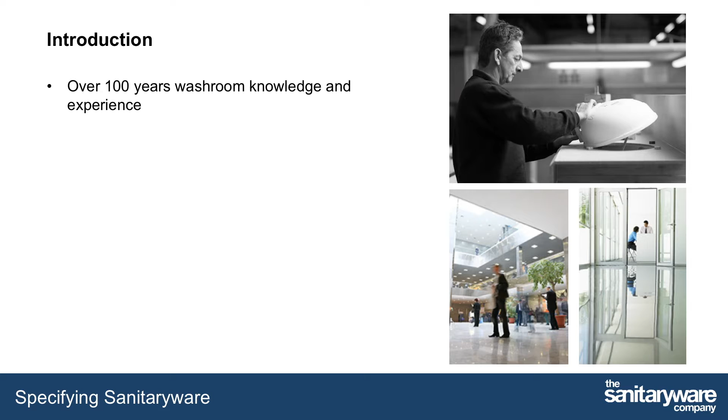The Sanitaryware company has been born out of over 100 years of knowledge and experience in the washroom market. They cover projects over the whole of the UK with offices in both Northamptonshire and Staffordshire, and are able to assist you with specifying sanitaryware for projects by providing technical information and advice, arranging samples, mood boards if required, and creating project-specific NBS specifications.

A good sanitaryware supplier will be able to provide you with the following: design advice, 2D CAD blocks, technical product data sheets, standard NBS documents, bespoke specification writing service, dedicated project manager, customer service team, product guarantee, and easy contact options.

The learning aims of this CPD are usage, design, building regulations and standards, along with budget, and how each of these factors into what sanitaryware items are specified for a project.

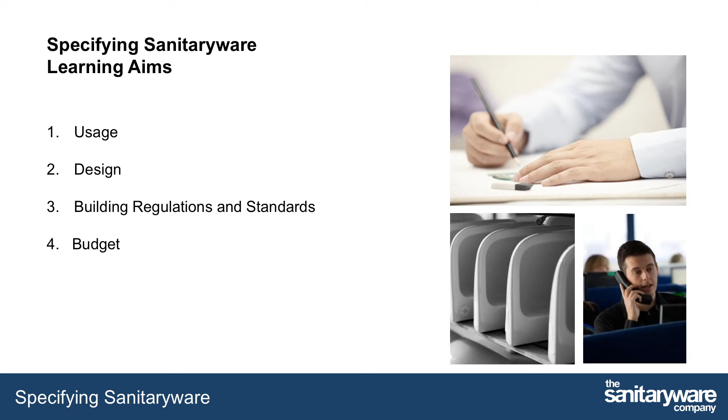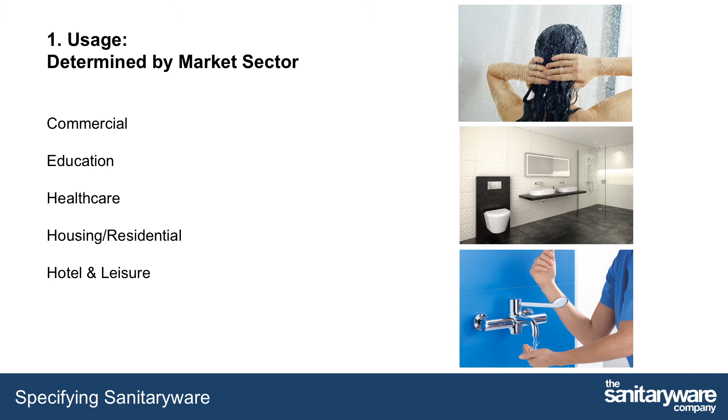When specifying sanitaryware, considering the nature of your environment, the type of building, and the market sector will very much determine the product you choose and what characteristics are most important in that decision.

When specifying projects in the commercial sectors, there are several factors to consider. The look of an item may be a key consideration depending on the areas. For example, a high-end office project may consider this the most important factor in the decision on sanitaryware. In this situation, wall-hung WCs, vessel basins, and brassware available in stylish finishes such as matte black would be considered.

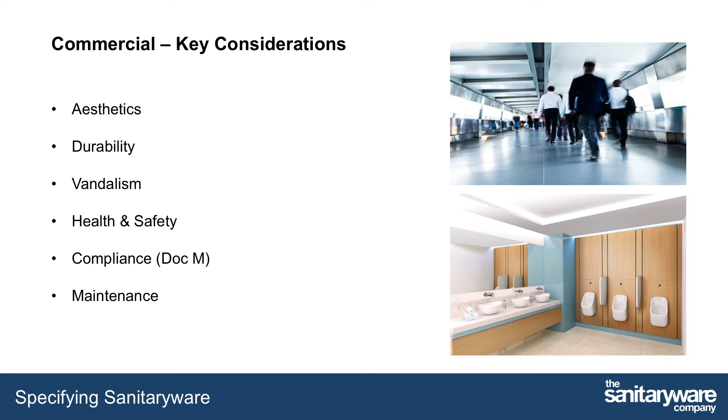Whereas in a warehouse factory washroom, the overall look of the items may fall much lower down the list of considerations. Durability and resistance to vandalism may be considerably higher.

Projects within the education sector will need to consider some other factors compared to commercial projects. In addition to vandalism and durability, which must be considered in the same way as in the commercial sector, health and safety must be a key consideration. TMV3 valves should always be fitted in the education sector to prevent scalding.

There are several regulations to consider in the education sector which specifically relate to the washroom environment. BS 6465 offers a scale of provisions for all non-residential washroom facilities, giving guidelines for nursery, primary, secondary, and further education washrooms. This will be covered in more detail later in the video along with examples.

The first consideration when specifying sanitaryware for the healthcare environment should always be compliance with any regulations. The regulations which would have a bearing on the sanitaryware are HBN 0010 Part C for England and SHTM 64 in Scotland. This covers guidelines for sanitaryware assemblies in healthcare environments. We will go into more detail about these during the regulation and standards section of this video.

The aesthetics of products are most important in residential projects, and this is often linked to the budget for the overall scheme. If it is a private bathroom refurbishment where you are working directly with the client on their own bathroom, they will want to pick items based on how they look and fit in with the overall style of not just the bathroom but their whole house, so the decision may rest on their personal preference.

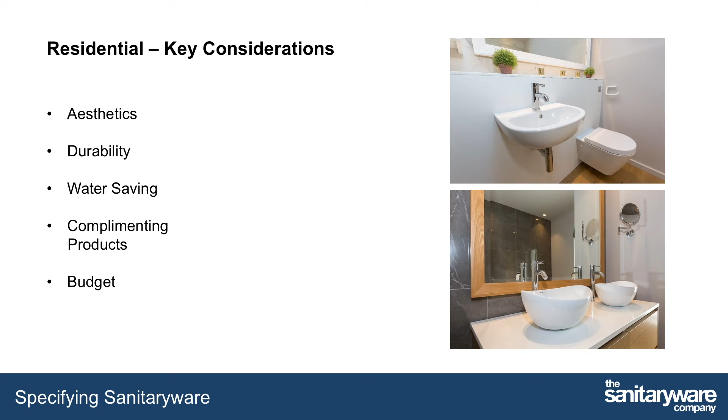For these projects, showers are normally used rather than baths to reduce water. Taps which have a low flow rate per minute and WC cisterns which have dual flushing with low effective flush volumes will all help to achieve this standard.

Within the hotel and leisure sector, the considerations are similar to those we have just covered for residential projects. However, there are a few additional considerations such as maintenance.

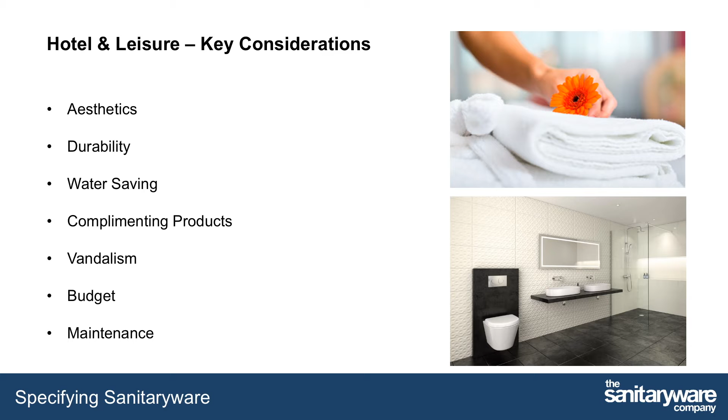In most hotels, there is only a small window of time where all rooms have to be cleaned and turned around for a new guest. Wall-hung WCs are very useful to help with this. They are suspended off the floor by about 100 to 150 millimeters, which makes it a lot easier for the floor of the washroom to be cleaned without the base of the WC getting in the way or collecting dirt between the WC and the floor.

There are many different styles of WCs available. For example, close-coupled have an exposed cistern made from ceramic and are great for areas which have a small budget or not much space, as they don't need any ducting or boxing to be constructed to hide the cistern.

Each WC pan will have one of three types of rims. An open rim, this is an upside-down U-shape, and water flows into the bowl from this all around the edge. A boxed rim is similar to the open rim, but it is closed on the bottom with holes at set points to let the water flow into the bowl.

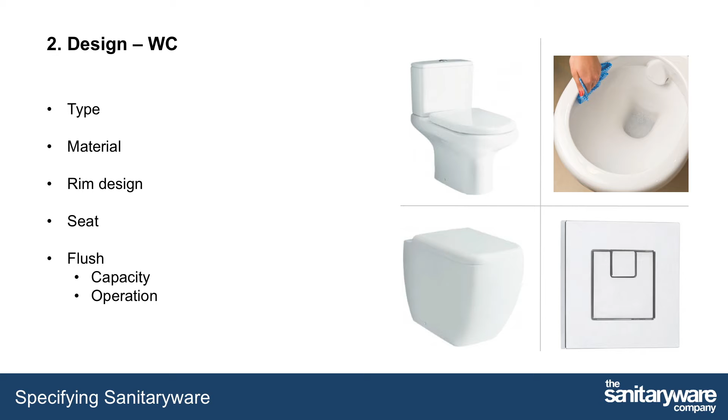The most recently developed WCs have a flushing design known as rimless. These WCs do not have a rim and have a water outlet at the back of the pan which pushes water around the pan with enough force that the whole surface is cleaned without the need for a rim, making this design very hygienic. For areas where urinals are to be used, there are many things to consider.

Firstly, what type of urinal bowl is most appropriate? Concealed trap urinals, such as the one shown in the top left-hand image, have completely hidden services with both the water inlet and the bottle trap from the waste hidden behind ducting. This is ideal in public areas where vandalism could be an issue.

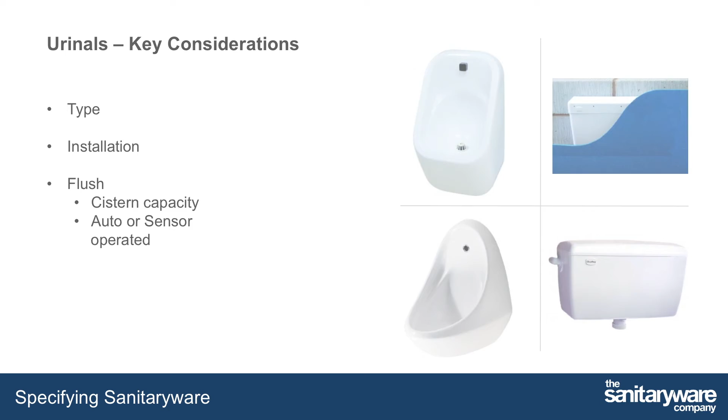An exposed trap urinal bowl will have the bottle trap fitted to the underside of the urinal bowl and be visible to users. If space is at a premium or budgets are tight, then a wall-hung basin would be the best option, as there is no vanity required for the basin to be mounted to.

For commercial and education, washroom basins which are installed into a vanity unit are often preferred, as they allow all the services and pipework to be hidden within the unit, making a tidier and more vandal-resistant finish.

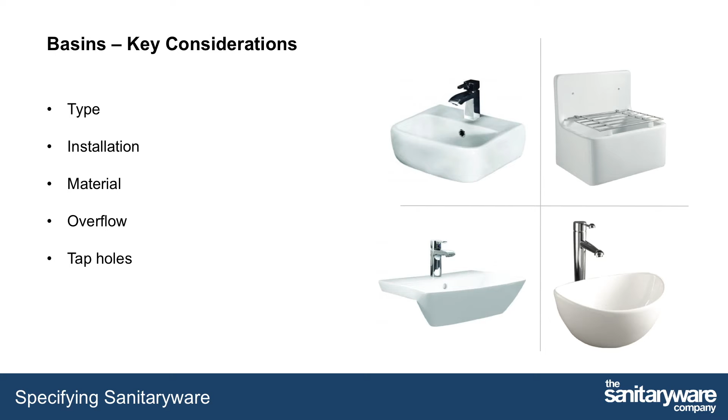Although ceramic is the most common material for basins to be manufactured in, they can also be produced in several other materials. These are especially useful if you are specifying for heavily used areas or areas which are prone to vandalism. There are many different styles of taps you will need to consider to make sure you specify the right tap for your projects.

In general, single taps are most popular in all sectors. They can either allow the user to control the temperature, normally via a lever, or deliver pre-mixed water at a set temperature. Pairs of taps are still used in some specific areas, in particular dementia care units, as patients recognize a pair of taps easier than a single tap.

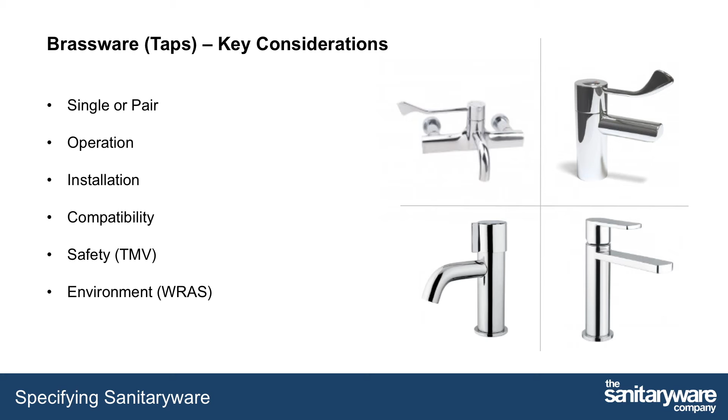And many cleaners areas, as it allows water to be delivered at a very hot temperature for cleaning and killing bacteria. Regardless of if you choose a single tap or a pair of taps, how the user operates it will be a key factor in which tap you decide to specify.

As with brassware, similar things need consideration when deciding what shower to specify. How the shower is going to be installed is key. If you want to conceal the pipework from the shower valve to the shower head or water outlet, you will need to make sure there is a void for the shower to be installed into or onto.

If it is a refurbishment project, you may be constricted by the current layout of the room, and you may not be able to conceal services, so an exposed shower valve may be required. This will allow pipework to be face-fixed to a wall.

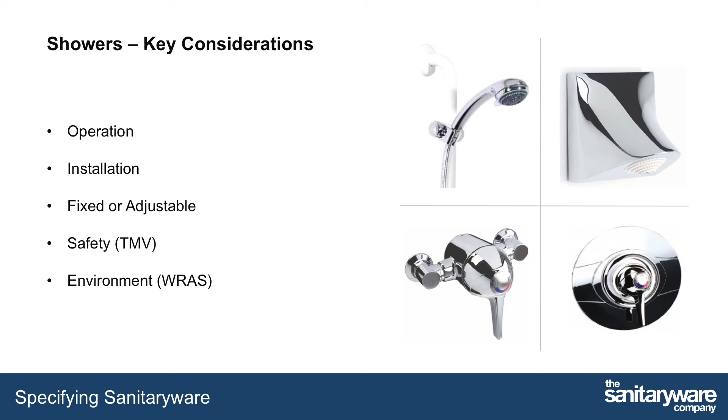Within most commercial properties and all those open to the public, there should be provisions for disabled access both in the building itself, ramps, lifts, etc., and also with the washroom facilities. This is normally in the form of a Doc M washroom. We will cover Doc M and the regulations in more detail later in this video.

The items that are required to make a wheelchair-accessible Doc M area are normally specified and purchased in a pack, which contains what you need to create a compliant area. The decisions you need to make prior to specification are what type of pack is required. Is it a WC or shower pack?

If it is a WC pack, how will it be installed? Will the cistern be concealed or exposed? The packs are normally available in different color options. These relate to the grab rails and the WC seat.

All taps in a Doc M pack should have their temperature controlled via a TMV3 valve. In most packs, the tap supplied will have a built-in TMV valve.

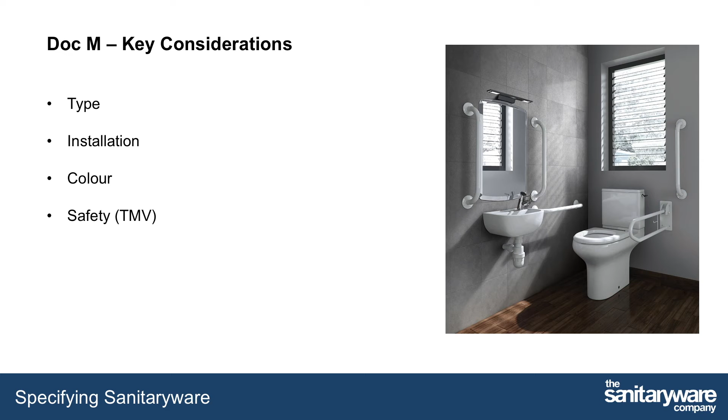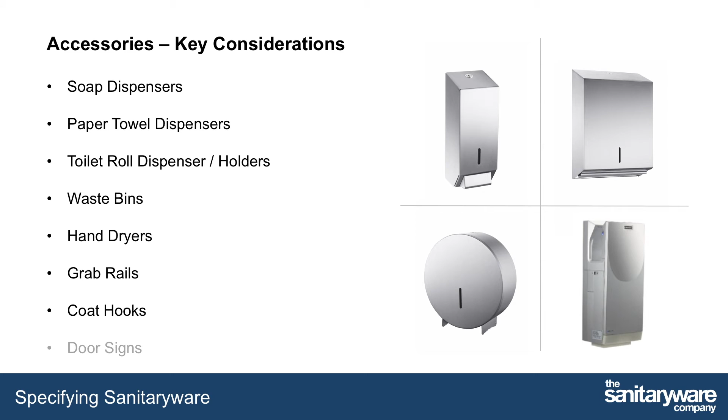The final finishing touches to a washroom is often the accessories. Items such as soap dispensers, toilet roll holders and hand dryers are available in lots of different styles, finishes and materials. Depending on the project, some will be more appropriate than others.

Washroom installations are often subject to extensive regulations and standards, and an awareness of these at specification stage can often help to avoid problems further down the line. Probably the most commonly acknowledged regulation is the Universal Access Facility under Document M of the Building Regulations.

Part M was amended in 2015 and incorporates the changes that were made to the Equality Act 2010. In summary, these changes were made to improve access for everyone rather than just for people with disabilities. An easy rule of thumb is that if you need building regulation approval for the project, you will need to be complying with these regulations. All of these rules apply to educational facilities.

BS 8300 highlights the design considerations throughout the building, taking into account disabled users' needs, and BS 6465 will indicate the required number of washrooms for any building. We will come back to that one later in more detail.

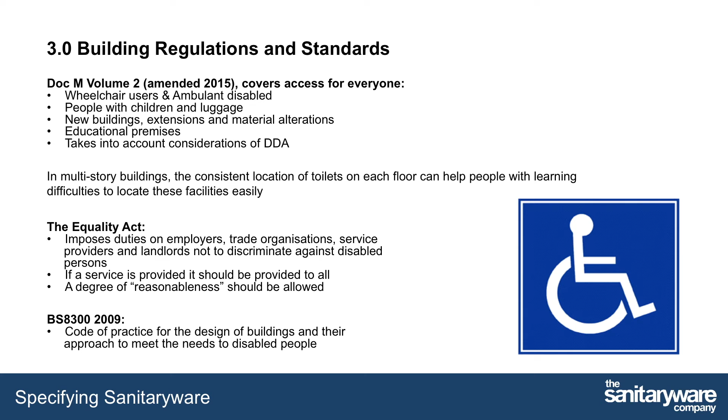NB. Doc M requires a WC pan projection of 750 mm, whereas in healthcare the projection is 700 mm. Previously, a basin with a central tap hole was acceptable, but now the tap must be positioned so that it is on the side of the basin nearest the WC.

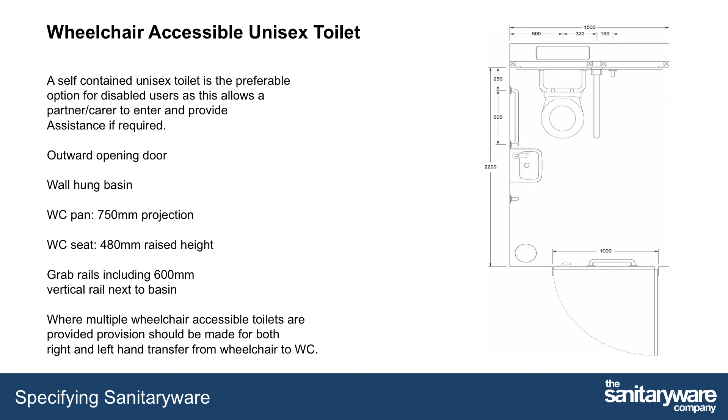New build layout. This typical layout requirement shows the configuration option for a new building. The guideline for any run of 4 or more cubicles is 2 to be standard, 1 enlarged and 1 ambulant.

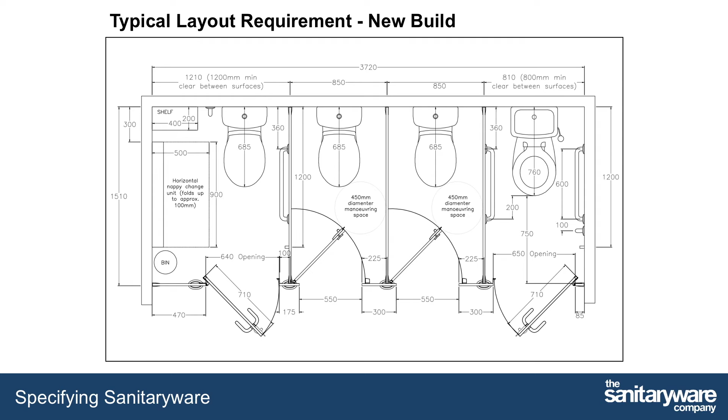If you are refurbishing an existing washroom, then you need to ensure that the replacement washroom is as good as what is being removed. Every same-sex washroom must have at least one WC compartment for the ambulant disabled. If there is only one cubicle in the washroom, then it must be ambulant.

The ambulant disabled cubicle must include grab rails, 2 at 600 mm horizontal, 1 at 600 mm vertical. A minimum free activity space of 750 mm from the front of the pan to the door. The cubicle must not be narrower than 800 mm.

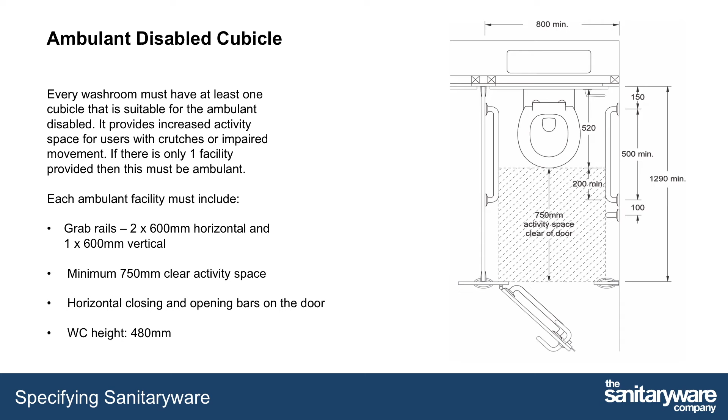The door swing must not interfere with the free activity space, therefore you are looking at an outward opening door, unless the cubicle is very large, 1900 mm plus. Horizontal closing and opening bars are required to each side of the cubicle door. The height to the top of the WC should be 480 mm.

Every standard cubicle must have a minimum 450 mm diameter maneuvering space within the cubicle. Doors and bolts that can open with a maximum force of 20 newtons. Indicator bolts and doors that are capable of being operated with a closed fist.

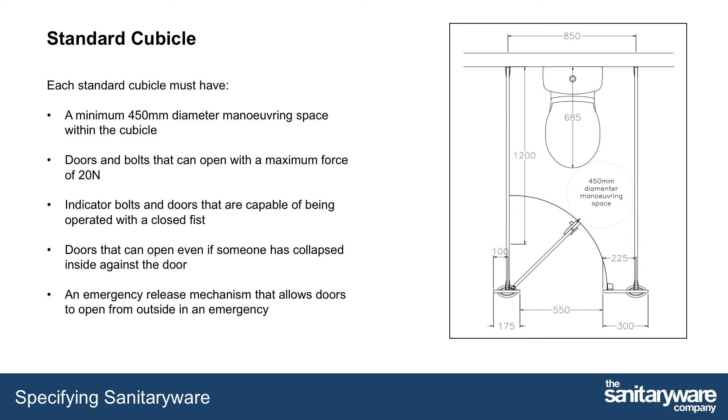Doors that can open even if someone has collapsed inside against the door. An emergency release mechanism that allows doors to open from the outside in an emergency. A standard height WC can be used in this cubicle.

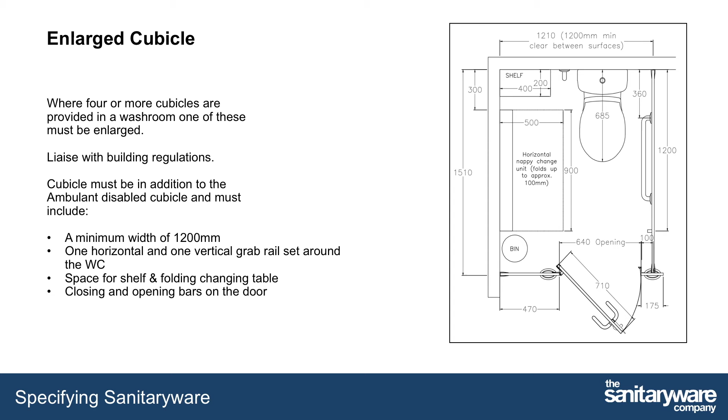Where 4 or more cubicles are provided in a washroom, one of these must be enlarged. The enlarged cubicle must be in addition to the ambulant disabled cubicle and must include a raised height WC at 480 mm high including the seat, a minimum width of 1200 mm, 1 horizontal and 1 vertical grab rail set around the WC, space for shelf and folding changing table, closing and opening bars on the door.

The Equality Act replaced the DDA regulations back in 2010. Colour contrast is part of the disability discrimination section covered by the Act. This will have some impact on the aesthetics and the design element of the washroom. All white washrooms are no longer an option.

Laminate manufacturers will have charts for all their products clearly outlining the luminescence value of each colour, and a difference of 0.30 between colours is obligatory.

It's worth noting that the way a room is lit will affect the luminescence value of the selected colours, as will any natural light entering the space.

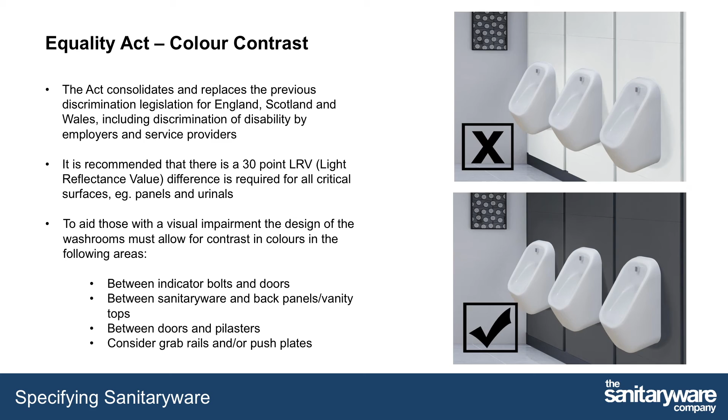To mention a few of the other requirements that must be adhered to regarding the new Equality Act 2010: all taps must be operable with a closed fist.

One urinal and one basin must be set at a lower height. A Doc M urinal is set at a lower lip height and has grab rails for ambulant and disabled users. This is also used for children.

Wheelchair access toilets must not be used as baby change facilities. A unisex wheelchair access toilet must be provided wherever there is a standard male-female washroom, as we mentioned earlier.

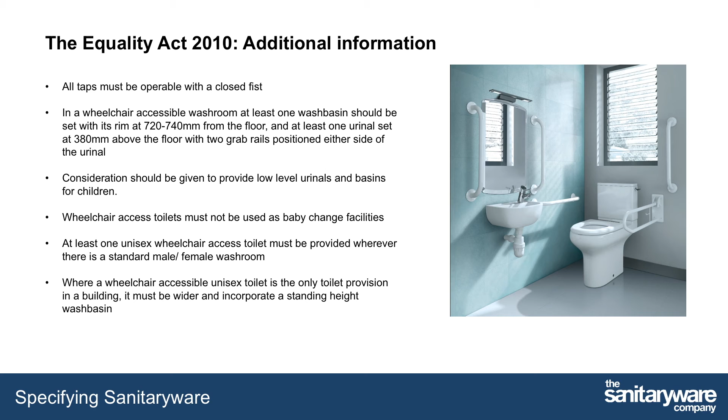If your building has only provision for a wheelchair-accessible unisex toilet, then it should be larger and incorporate an additional wash-hand basin set at a height suitable for standing use, e.g. 800 to 830 mm. Now we will look at two standards in more detail.

The first relates to the scale of provisions. This document provides recommendations for the scale of provision, selection and installation of sanitary appliances. It is divided into the table shown here and advises on the number of fittings required for each different building type and application, and also the number of fittings required in relation to each other.

To illustrate with some examples, in a secondary school you would need to provide one fitting for every 20 pupils, with the minimum number of fittings being 4. In this example, the term fittings applies to the sum of the WCs and the urinals.

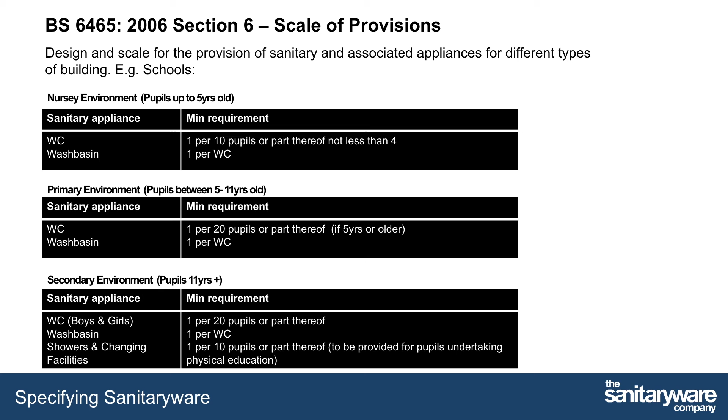The HTMs, Health Technical Memorandum. The new document for best practice guidance is called Health Building Note 0010, Performance Requirements for Building Elements Used in Healthcare Facilities. HBN 0010 supersedes HTM 56, 60, 61, 64 sanitary assemblies, 68 duct and panel assemblies, and 69.

The document is driven by 3 key drivers: building, the standardization and pre-assembly of components, as well as flexibility, adaptability, and security. This can be addressed through standardizing product, using one product, pre-assembled units, and lockable panels.

Maintenance, durability, life cycle, and maintenance costs, along with sustainability. This can be addressed through correct specification of materials, hinged panels to replace lift-off panels where possible, sensor taps, reduced or dual flush volumes, and urinal sensors can all reduce water usage.

Hygiene: patient safety and hygiene is of the utmost importance. Exposed surfaces should be smooth and easily cleaned. Sensor taps and no overflows all reduce the risk of infection. Plugs are only to be used in private bathrooms.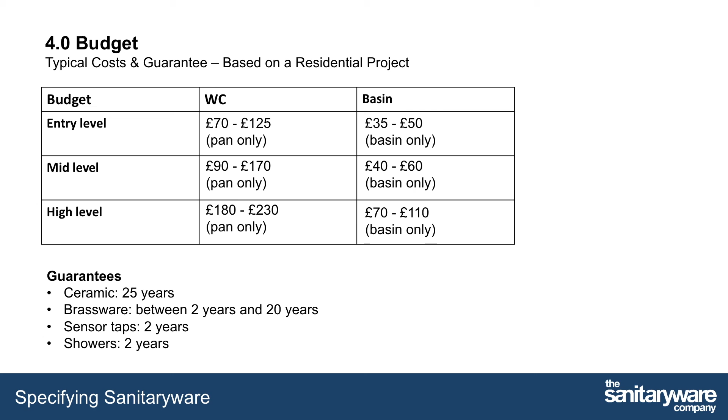We've included some typical guideline costs for you here.

So, to summarize, these are the main criteria that you as specifiers should consider when specifying washroom products and systems. By taking all these factors into consideration at the specification stage of your project, your clients will be assured of a washroom that is fit for purpose, meets their vision, is easy to clean, simple to maintain, and most importantly, fits their wallet.

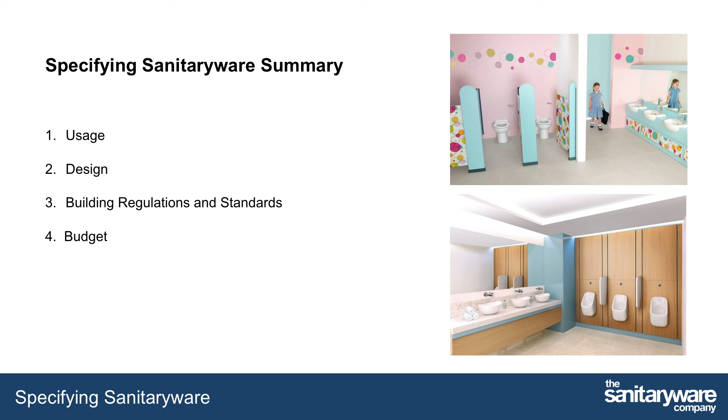Contractors will find that the procurement procedure and the installation suits their type of contract, and you, as specifiers, will be assured that all the regulations and standards have been met.